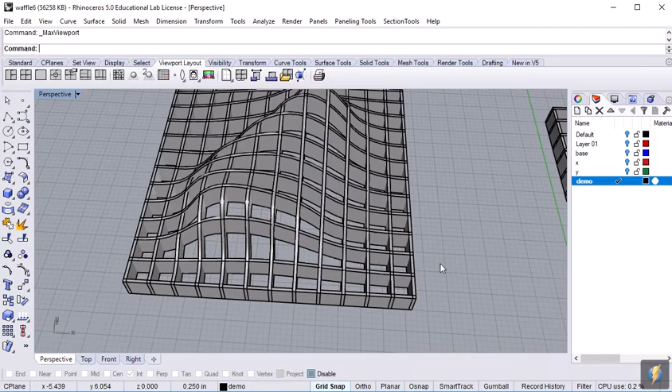So at this point in the process, you should have something that looks like this. It's basically a grid. The outside dimension is 12 inches, and each of these surfaces is whatever the dimension of your plywood is. And in this case, it's 0.135 inches.

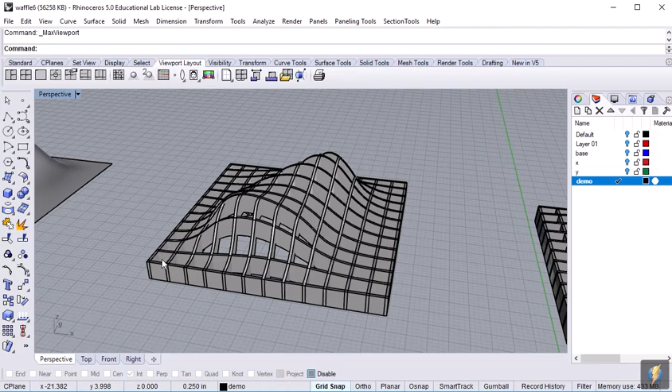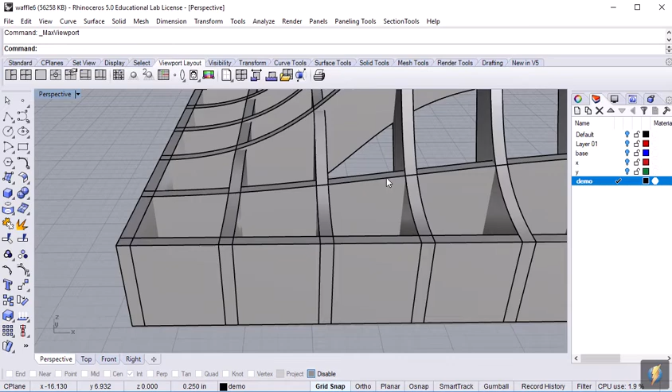So the next step is figuring out how do you laser cut notches. If this was one piece, we have to carve out a notch halfway down on this side and on the other side, so that when the jigsaw pieces fit together, they're going to be flush. So the way that we're going to do that is that one dimension of this grid, either the X or the Y, you're going to select all of them and drop it down 1/2 inch.

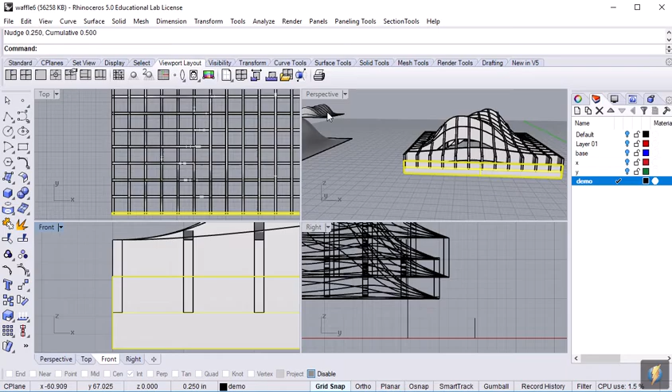Okay, so basically if I drop this down 1/2 inch, oops. If I drop this front piece down 1/2 inch, like that, you can see what we're going to do here. We're going to use Boolean Split, go in there and split away that piece, and then on this piece we're going to split away the other piece. So that's what we're going to figure out.

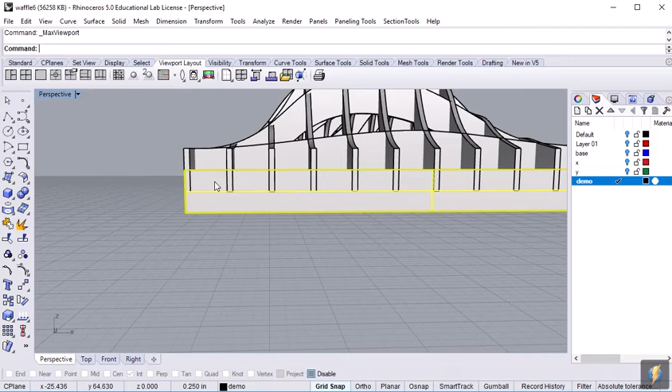Now, one of the things that's going to help you manage this, because at this point we have to be really precise. We were really precise with measuring the thickness of the material. Now we have to be very precise going halfway through the material here. The depth here is 1 inch, and if we go exactly 1/2 inch on both pieces, then the whole thing will end up being flush when we put the pieces together as a big jigsaw.

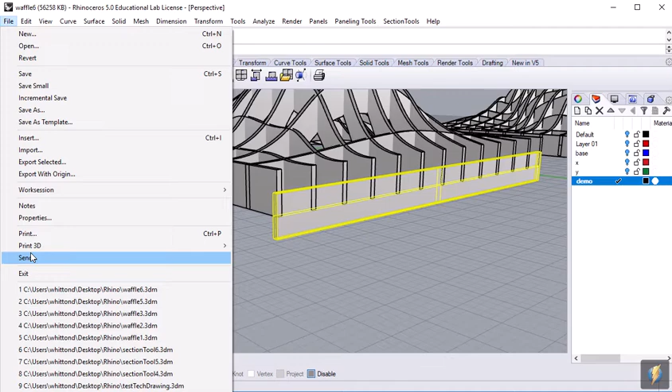So the best way to do that is go into the preferences. So under File, if we go to the properties of the whole document, and then we come to modeling aids, your nudge may be set differently. So what I've done is, because we're using inches and we're trying to move things around very precisely, I've got 1/4 inch, 0.25 of an inch on my nudge key.

Okay, so you want to set this to make your life simpler, and every time you hit the nudge key, it's going to move 1/4 inch, so that 2 hits of the nudge key would be moving everything down 1/2 inch. And it's a bit confusing because we're using a Mac keyboard. So Alt plus arrow key on the Mac keyboard is the Option plus the down arrow. Okay, so keep that in mind. I know it's a bit confusing, but Alt means Option on your keyboard.

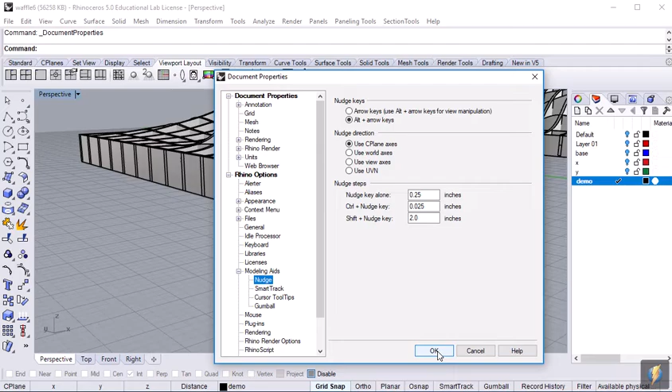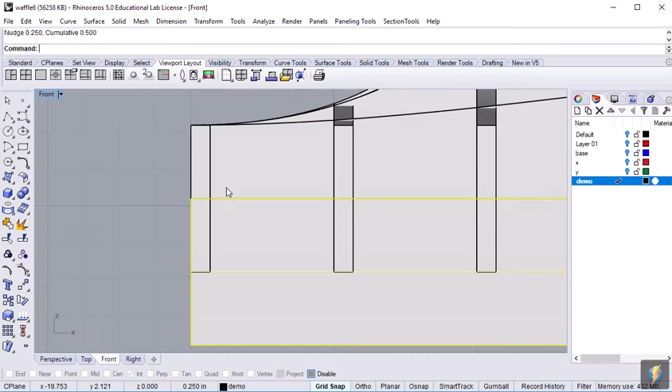Okay, so if you have that set up, it's going to be really easy to just select one of these pieces. Now I'm holding down the Option key and I'm hitting the arrow, and I can go 1/4 inch, another 1/4 inch. So even though I'm not aligned with everything on the grid, because I should have, but I didn't align it to the grid, I'm still moving this down 1/2 inch, and it's all going to work out very well.

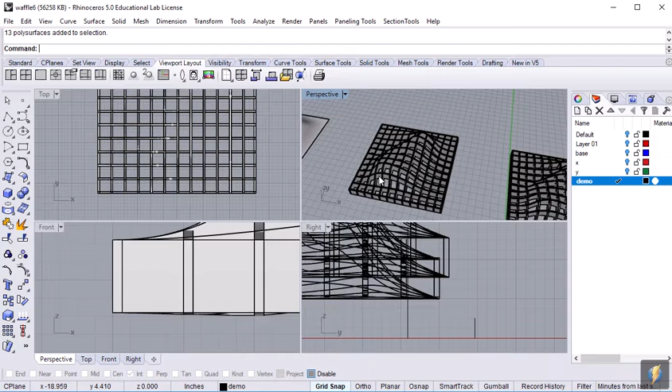Okay, so I have all of the X and the Y pieces grouped together. So I can select them all this way, or select them all in the Y direction. You don't have to select them all and group them, but it'll save you a bit of time. It'll keep things organized. So all I have to do is select one of these planes, and in this case I'm on the Y, and if I hit the Option key and the down arrow, they all move down 1/4 inch. So it should look like this.

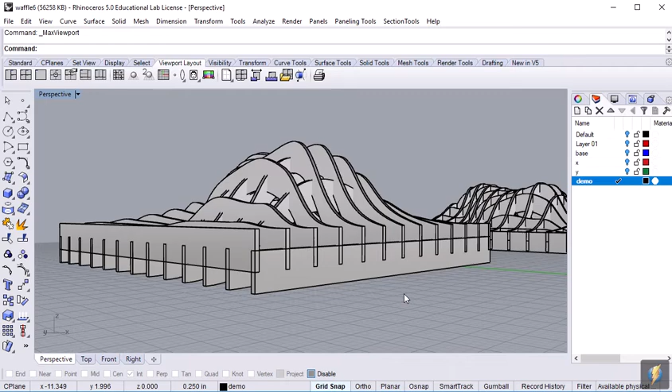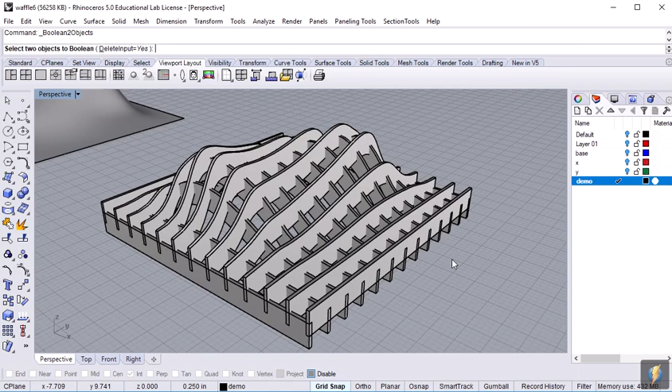Okay, so now we're going to use Boolean Split. So if you go over to the left-hand menu bar, this one is Boolean Split. It's a bit tricky. You're going to have to play around with this a bit before you get it 100%. So let me start over again. Select the surfaces to split. Okay, so I'm going to start with this surface. Actually, it's not letting me. So apparently it wouldn't let me select the whole row. That's okay. We can still work around this. Probably from the top view, it's going to be easier to select everything. So I'm going to go at it this way.

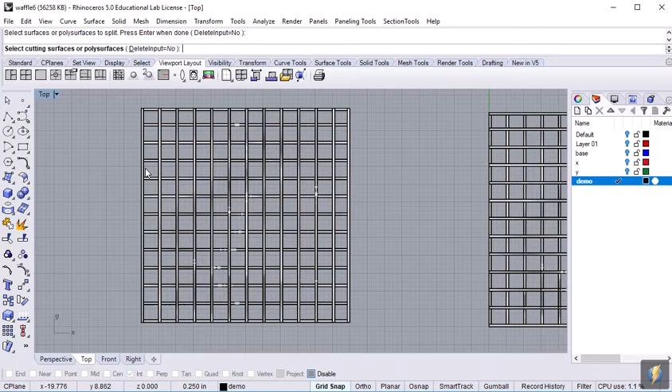So Boolean Split, select that tool, select the surfaces to split, and it says delete input, and I'm going to say no. I'm not going to delete the input. Okay, so I'm holding down Shift, and apparently with the Boolean command you have to get everything selected individually like this, which is kind of boring, but it's not a big deal. Okay, so those are the pieces I'm going to split, and then I hit enter when done. Select the cutting surface. Now what you need to do is just select the opposite dimension, the Y pieces.

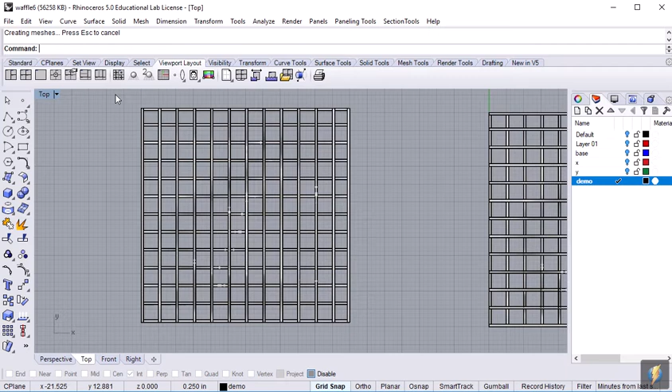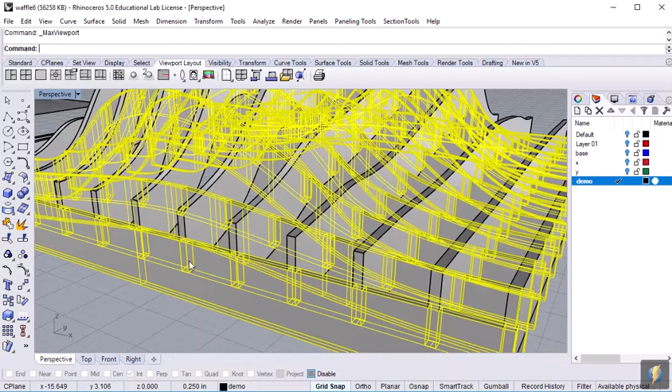And I know it seems kind of complicated, but in the end you'll see what's actually happening here. Okay, now this little donut thing is going to spin around because it's doing a lot of work. There's an awful lot of math going on in the background when you use these operations. Okay, so now that's interesting because it goes back to the group. I can select the group, and if we zoom in on it, you can see that all these little notches have been cut out, and that's what we want. But on this dimension, they have not been cut out.

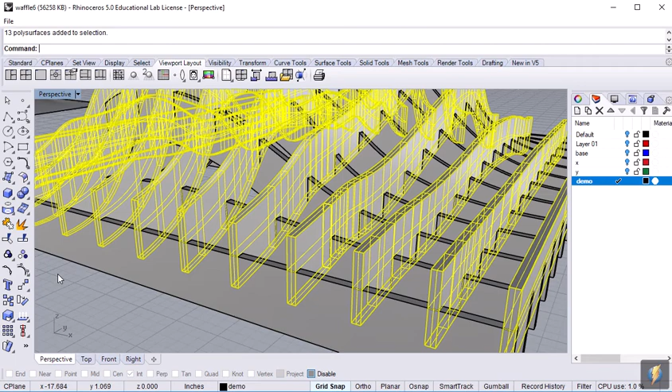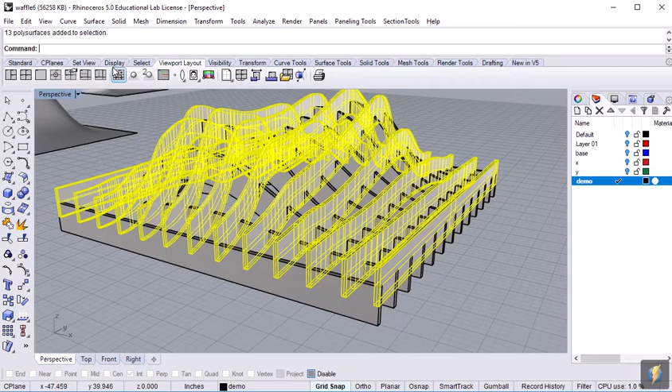So we have to go back and do that again, except that we reverse the order of the cutting tool. So we just go back and say, all right, let's do another Boolean split. The surfaces that we're going to cut are these ones. Okay, and then we're going to hit enter. And that time it seemed to select the group. I don't know why. Cutting surface. So we're going to cut it with,

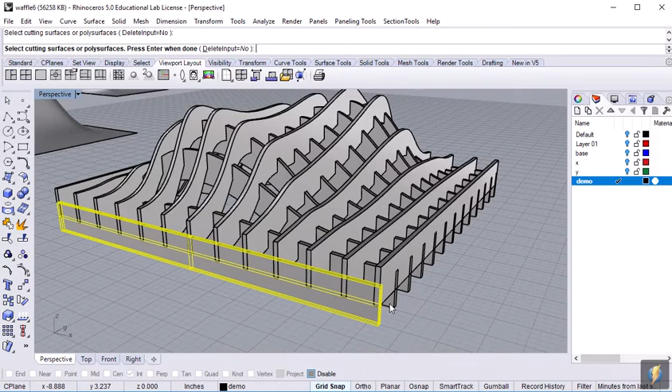this is where it gets a bit complicated. You'll see that it creates two pieces. One doesn't have any of the split notches, and you're going to select that one. And we have to go through each one of these, and you kind of have to see it. It's a bit complicated, but the one that does not have the notches. Okay. So you see I screwed up there. I didn't want to select that. So you're going to go through the entire length of this and select the other ones, and then you hit enter, delete input no, and then you're going to have a notch on both the X and the Y axis slices.